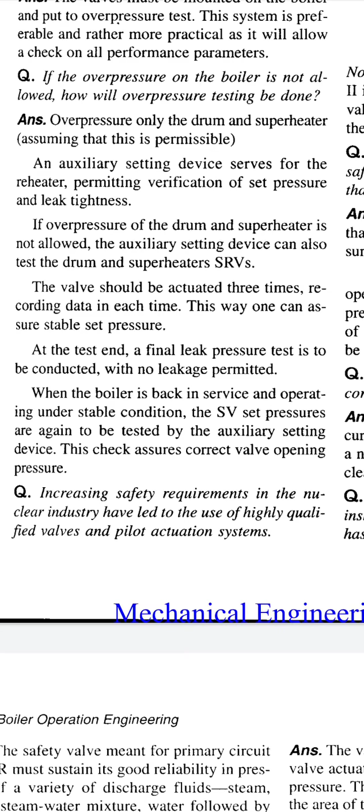Question: Increasingly, safety requirements in the nuclear industry have led to the use of highly qualified valves and pilot actuation systems. What are the essential requirements of the valve system installed in the primary coolant circuit of a pressurized water reactor?

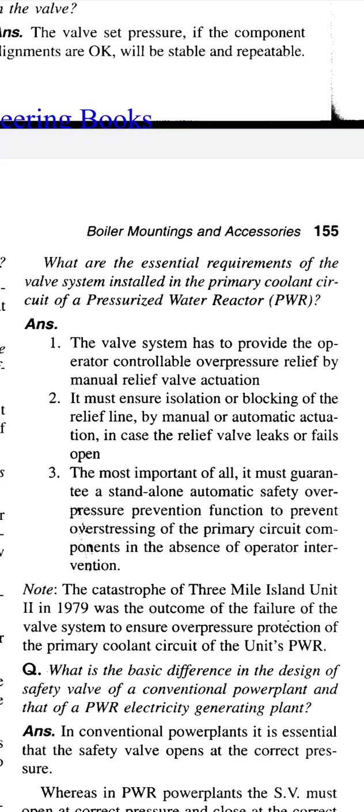Answer: The valve system has to provide the operator controllable overpressure relief by manual relief valve actuation. It must ensure isolation or blocking of the relief line by manual or automatic actuation in case of relief valve leaks or fails open.

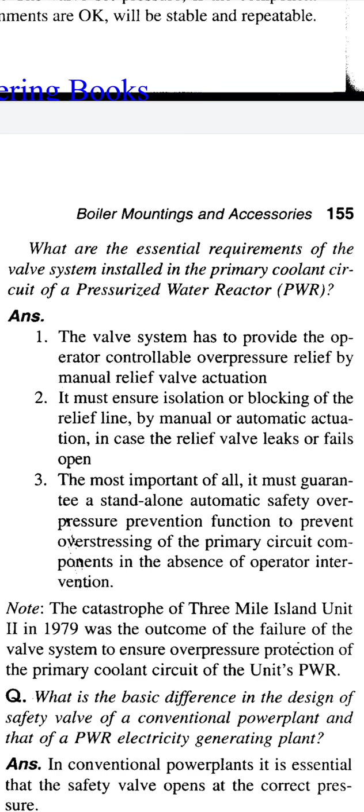Most importantly, it must guarantee a standalone automatic safety overpressure prevention function to prevent overstressing of the primary circuit components in the absence of operator intervention.

Note: the catastrophe of Three Mile Island Unit 2 in 1979 was the outcome of the failure of the valve system to ensure overpressure protection of the primary coolant circuit of the unit's PWR, pressurized water reactor.

Question: What is the basic difference in the design of safety valve of a conventional power plant and that of a pressurized water reactor electrically generated plant?

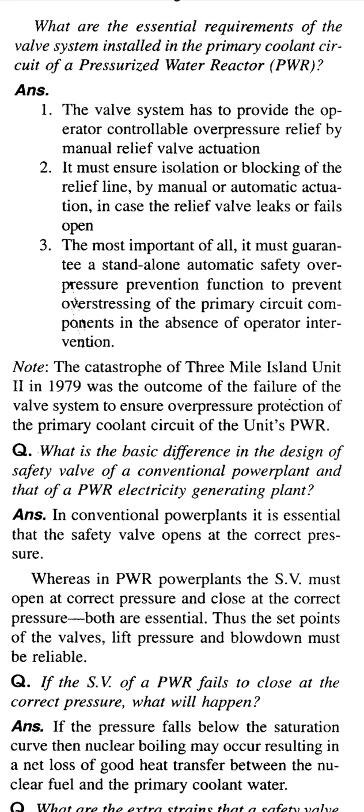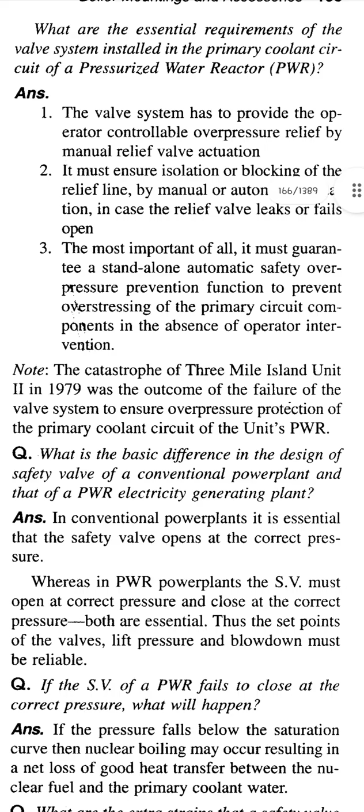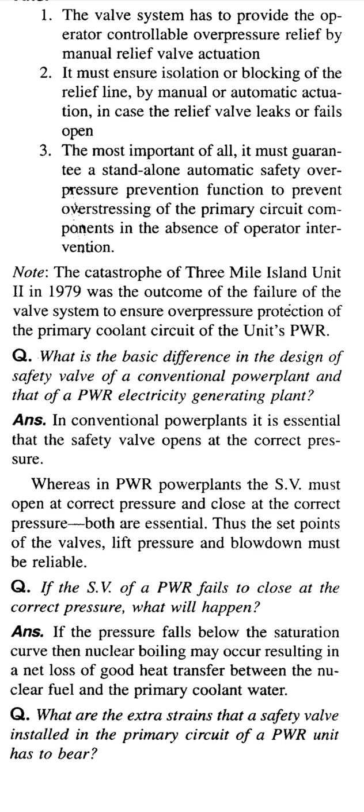Answer: In conventional power plants, it is essential that the safety valve opens at the correct pressure, whereas in PWR power plants, the safety valve must open at the correct pressure and close at the correct pressure. Both are essential. Thus, the set points of the valves, lift pressure and blowdown, must be reliable.

Question: If the safety valve of a PWR fails to close at the correct pressure, what will happen? Answer: If the pressure falls below the saturation curve, then nuclear boiling may occur, resulting in a net loss of good heat transfer between nuclear fuel and the primary coolant water.

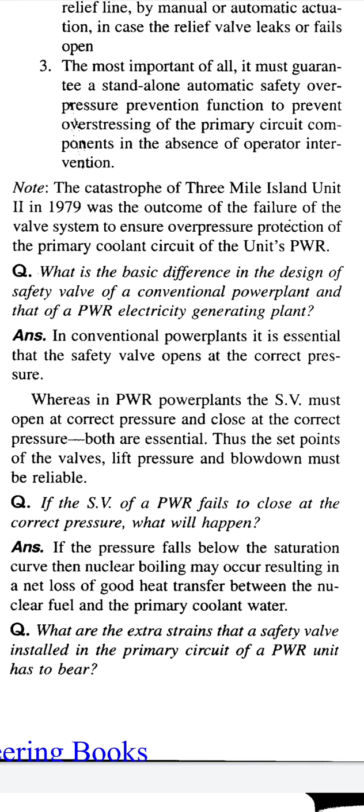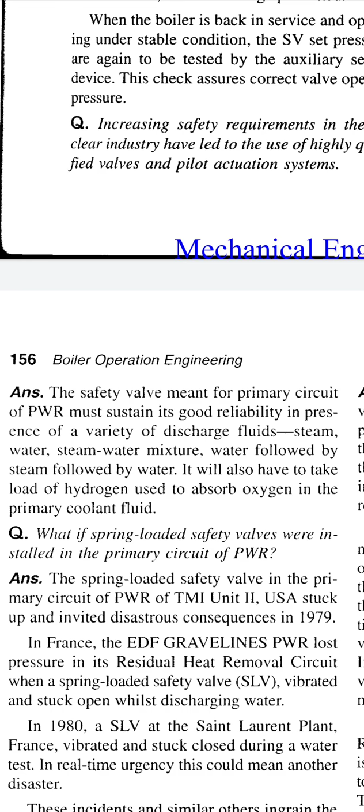Question: What are the extra strains that a safety valve installed in the primary circuit of a PWR unit has to bear? Answer: The safety valve in the primary circuit of PWR must sustain its good reliability in the presence of a variety of discharge fluids, steam-water mixture, water followed by steam followed by water. It will also have to take the load of hydrogen used to absorb oxygen in the primary coolant fluid.

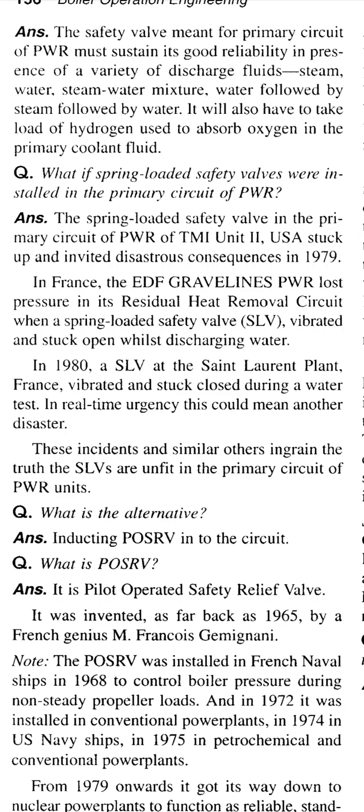Question: What if spring-loaded safety valves were installed in the primary circuit of PWR? Answer: The spring-loaded safety valve in the primary circuit of the pressurized water reactor of TMI Unit 2, USA, stuck up and invited disastrous consequences in 1979.

In France, the EDF Gravelines PWR lost pressure in its residual heat removal circuit when a spring-loaded safety valve vibrated and stuck open whilst discharging water.

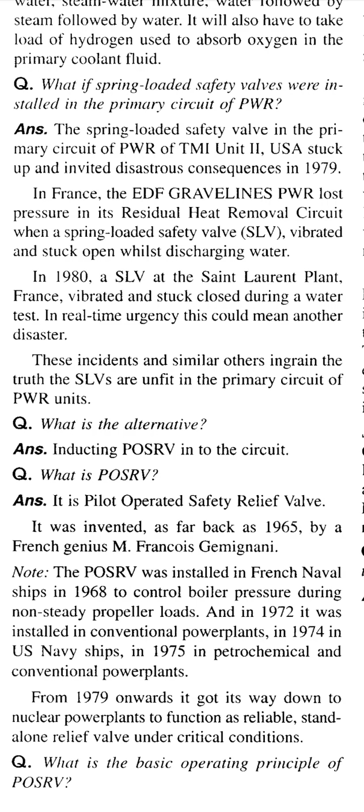In 1980, a spring-loaded valve at the Saint Laurent plant, France, vibrated and stuck closed during a water test. In a real-time emergency, this could mean another disaster. This accident and similar others ingrain the truth that SLVs are unfit for the primary circuit of PWR units.

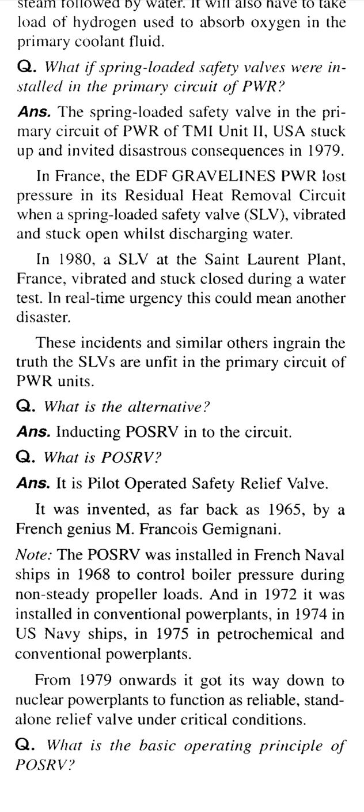Question: What is the alternative? Introducing and inducting POSRV into the circuit.

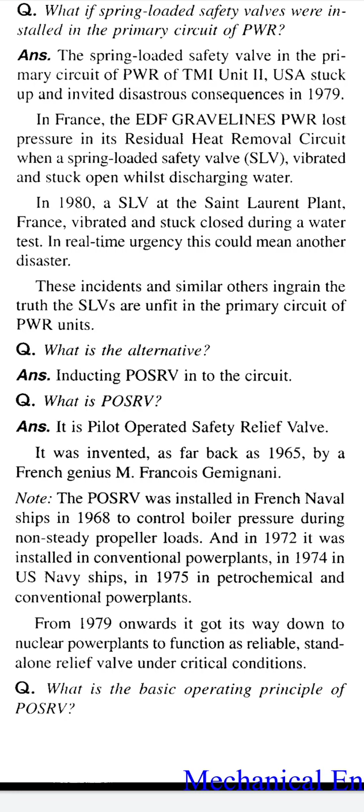Question: What is POSRV? It is the pilot operated safety relief valve. It was invented as far back as 1965 by a French genius, M. Francois

Gemignani. Note: the POSRV was installed in French naval ships in 1968 to control boiler pressure during non-steady propeller loads, and in 1972 it was installed in conventional power plants, in 1974 in US Navy ships, in 1975 in petrochemical and conventional power plants. From 1979 onwards it made its way into nuclear power plants to function as a reliable standalone relief valve under critical conditions.

So this is by the French genius Francois Gemignani. So there is no Indian genius.

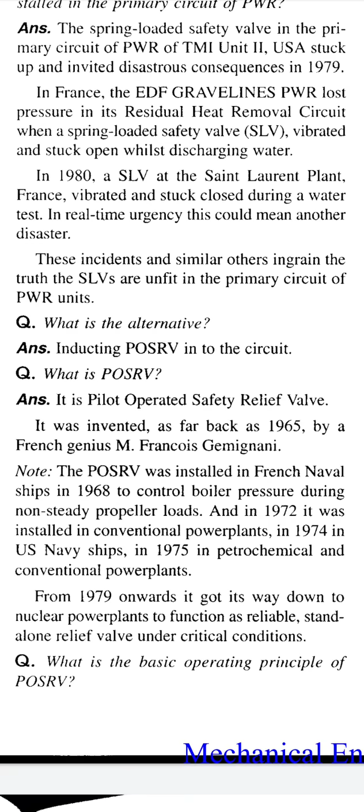Okay, the question: what is the basic operating principle of POSRV?

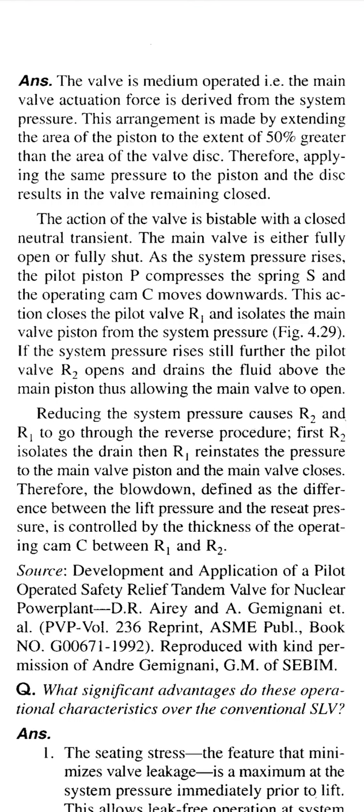Answer: the valve is medium operated, meaning the main valve actuation force is derived from the system pressure. The arrangement is made by extending the area of the piston to 50% greater than the area of the valve disc. Therefore, applying the same pressure to the piston and the disc results in the valve remaining closed.

The action of the valve is bistable with a closed neutral transient. The main valve is either fully open or fully shut.

As the system pressure rises, the pilot piston P compresses the spring S and the operating cam C moves downwards. This action closes the pilot valve R1 and isolates the main valve piston from the system pressure.

If the system pressure rises still further, the pilot valve R2 opens and drains the fluid above the main piston, thus allowing the main valve to open.

Reducing the system pressure causes R2 and R1 to go through the reverse procedure. First, R2 isolates the drain, then R1 reinstates the pressure to the main valve piston and the main valve closes.

Therefore, the blowdown, defined as the difference between the lift pressure and the reseat pressure, is controlled by the thickness of the operating cam C between R1 and R2.

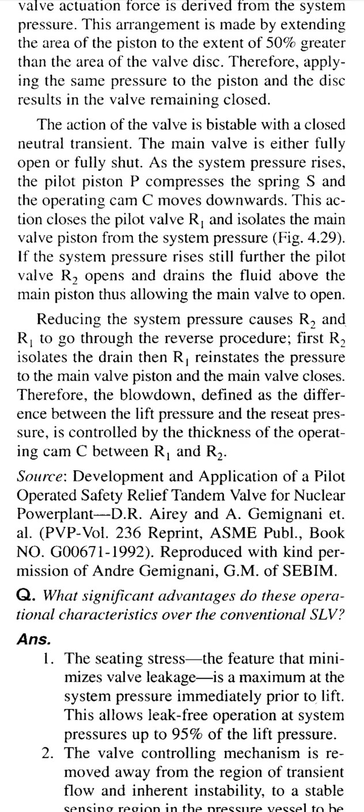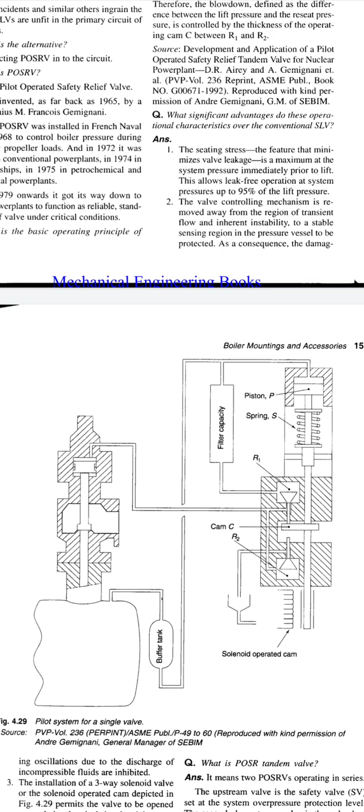We can see in the picture the piston P, spring S, R1 filter capacity, cam C and R2. The solenoid operated cam we can see in the picture. The buffer tank is also visible.

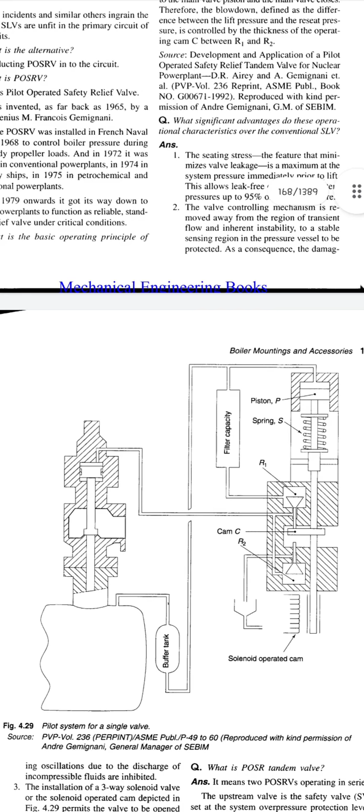So as per the description, the main valve is either fully open or shut. As the steam pressure rises, the pilot piston P compresses the spring S. So the pressure from the buffer tank, if it increases, the piston P compresses the S spring.

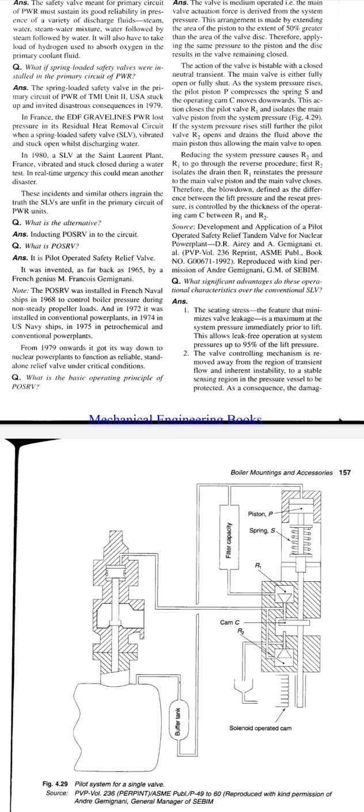So when it compresses the S spring, the operating cam moves downwards. The operating cam C is moved downwards. After moving downwards, this action closes the pilot valve R1.

So the R1 pilot valve is closed. R1 isolates the main valve piston from the steam pressure, shutting off the main valve steam pressure.

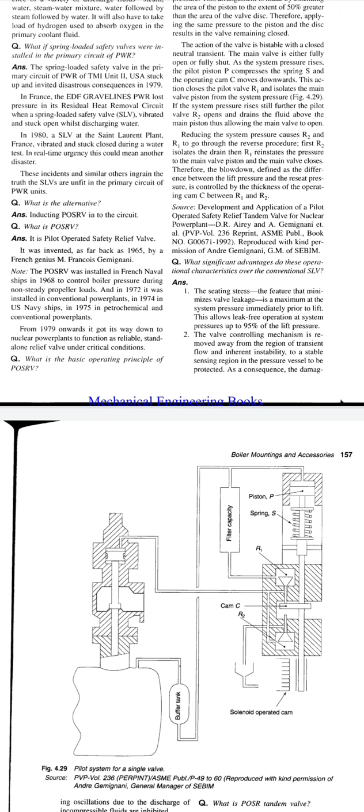After that, if pressure rises still further, the pilot valve R2 opens and drains. So if pressure rises, R2 will open and drain the pressure. So this is the pilot system for a single valve.

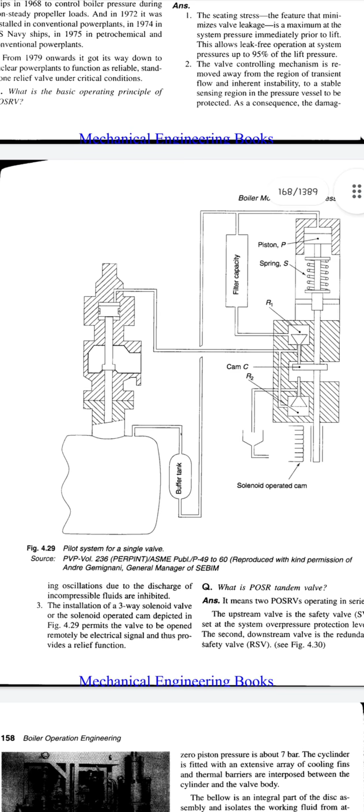So the next question: what significant advantages do these operational characteristics have over the conventional SLV?

Answer: the seating stress, the feature that minimizes valve leakage, is at a maximum at the system pressure immediately prior to lift. This allows leak-free operation at system pressure up to 95% of the lift pressure.

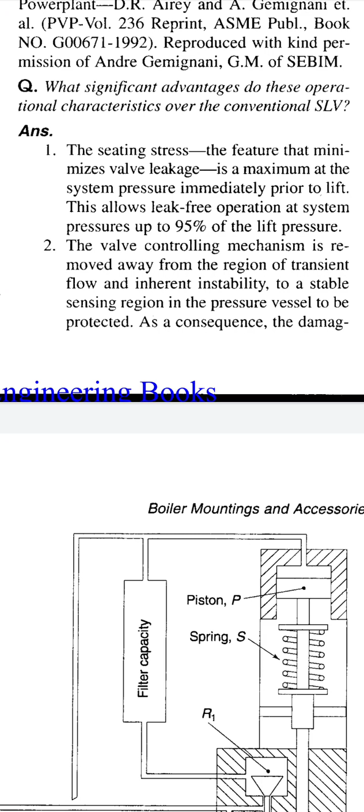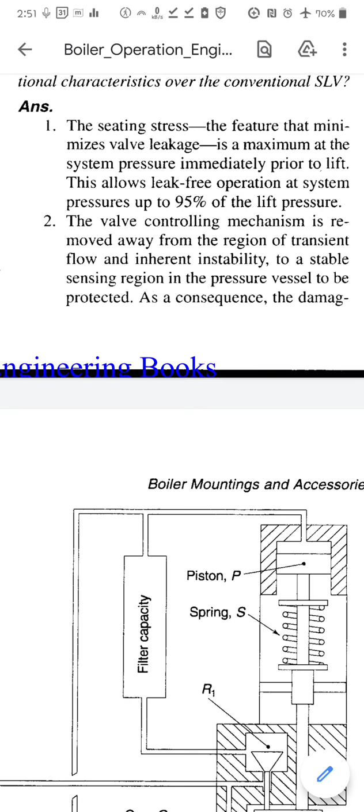Second, the valve controlling mechanism is removed away from the region of transient flow and inherent instability to a stable sensing region in the pressure vessel to be protected. As a consequence, the damaging oscillations due to the discharge of incompressible fluid are inhibited.

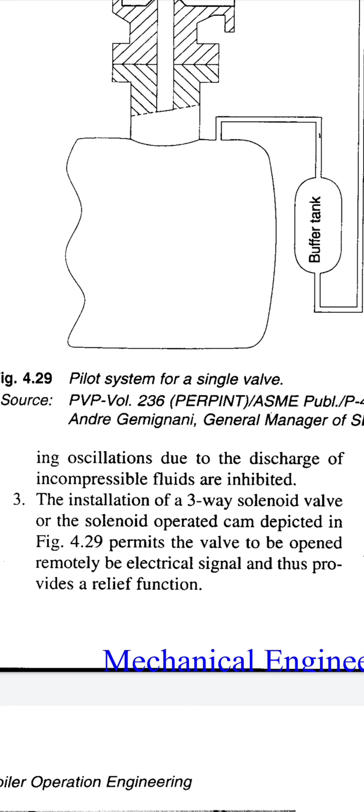Third, the installation of a three-way solenoid valve, or the solenoid operated cam depicted in the figure, permits the valve to open remotely by electrical signal and thus provides a relief function.

The next question: what is a POSRV tandem valve? Answer: it means two POSRVs operating in series. The upstream valve is the safety valve set at the system overpressure protection level.

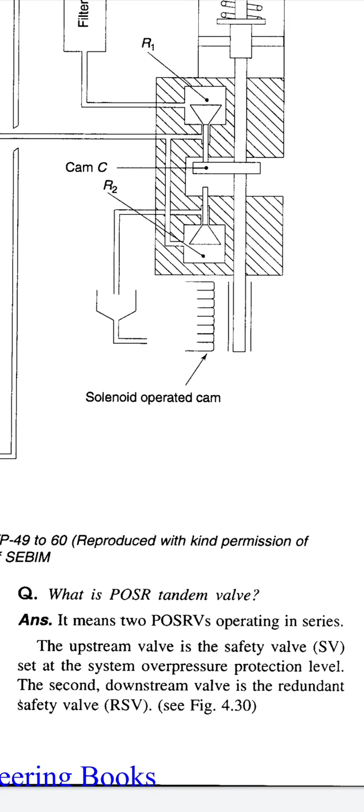The second downstream valve is the redundant safety valve, RSV. We can see the figure in the next video. Thank you.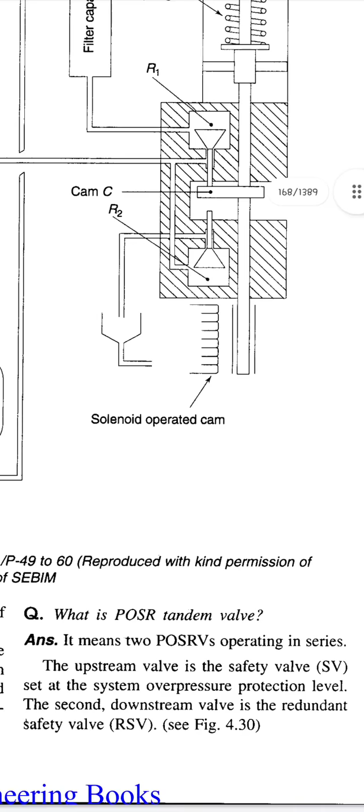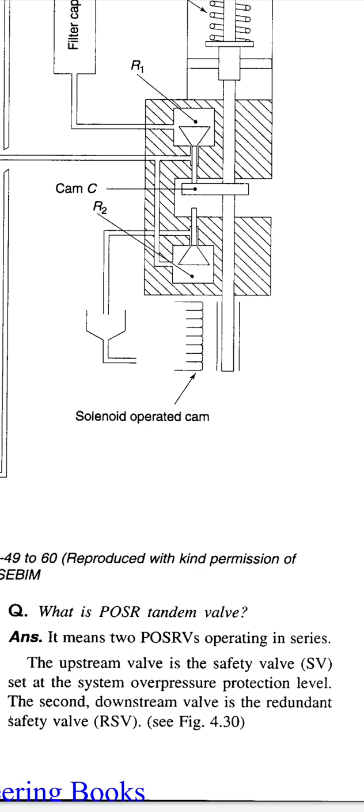Again, the question: what is a POSRV tandem valve? It means POSRVs operating in series. The upstream valve is the safety valve set at the system overpressure protection level. The second downstream valve is the redundant safety valve, RSV. Thank you.